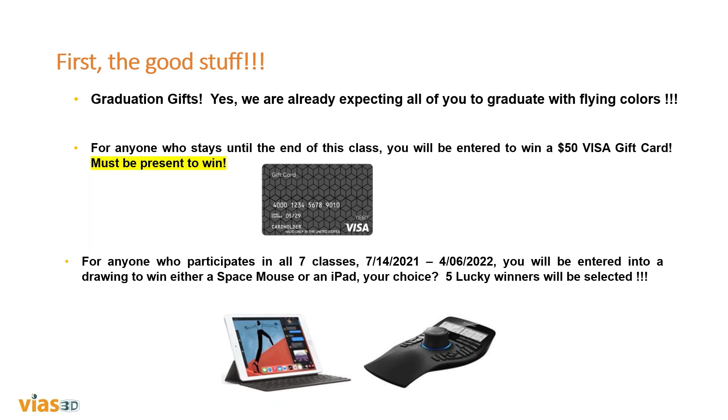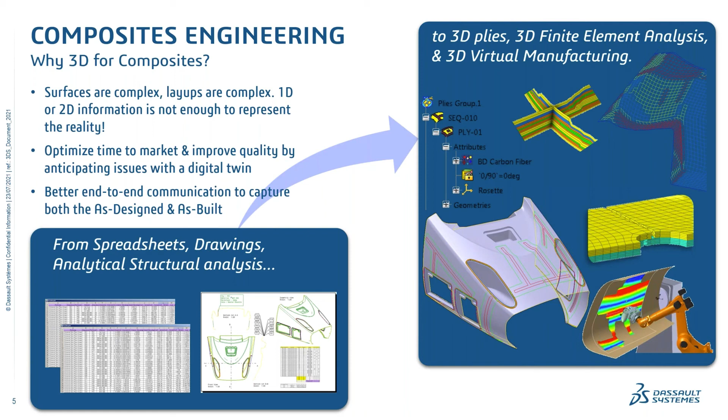So you really have this ability to capture both the as-designed and as-built by going 3D for composites. So what we propose is going beyond that 3D for composites, so the 3DEXPERIENCE platform that's going to include not just the design tool, but also all the manufacturing tools, as well as the structural analysis tools, and everything, as well as manufacturing, BOM, and everything.

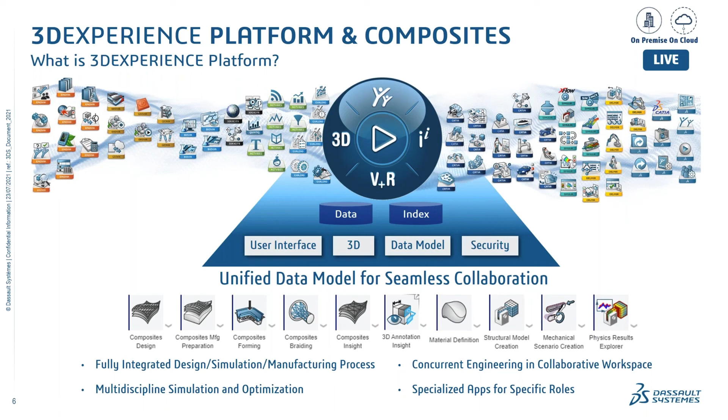So proposing the entire workflow in one platform, so you don't need to exchange data back and forth, going from your CAD tool to the FEA tool or to external software. You are able to run the entire workflow in one place without having to exchange data. You just open the data on the platform in one app or another.

And it can start at the conceptual design level, where you start to have a very raw idea of how many layers of plies you want in one area. So the laminate thickness in each area of the component you're going to work on. All that, of course, is driven by performance. So typically structural analysis performance. So stiffness, or this can be a stability requirement, or a frequency requirement, linear dynamics requirement. And of course with a weight target.

And starting from those requirements, CATIA, the software, the 3DEXPERIENCE platform, will let you iterate in order to reach the correct definition of the laminates. And then we can start to move forward, and instead of having just a view as a laminate, turn that view into plies, into conceptual plies first, and then to actual plies generated as wireframes, which you can then manipulate. You can control how the drop-offs are managed when you go from one thickness to another.

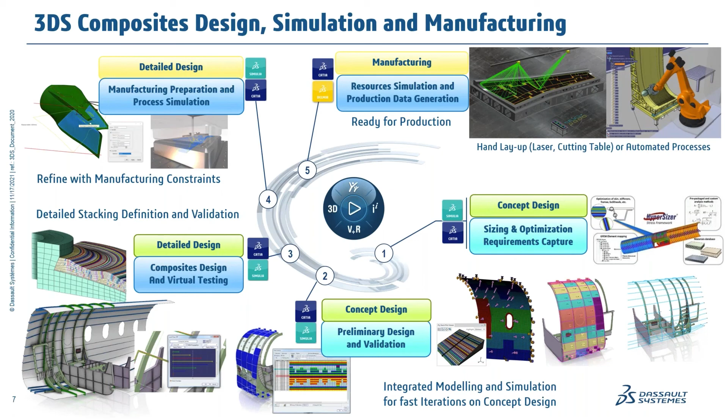And again, we do support multiple manufacturing processes. So whether we're talking about hand layup, automated fiber placement, or forming, we can do it. We can simulate the process, ensure the feasibility, and generate the necessary data in order to manufacture the part effectively in the shop floor.

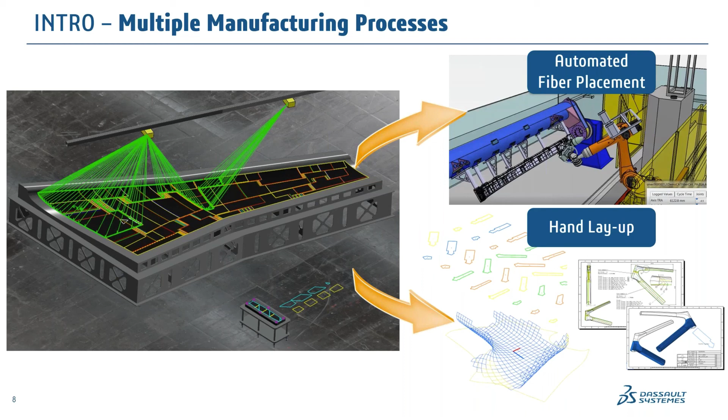So whether these are flat patterns, so the ply kit, as well as laser projection programs, we can do that. Or whether it's about simulating an automated fiber placement machine and generating the G-code, we can do that as well.

One other key is that not only do we offer a platform to have an explicit 3D design of plies, but also once you get those plies designed in 3D on the geometry with many complex refinements, as you will see deeper, we can also automatically have a structural analysis model generated and associative to that 3D model.

So it's really changing the game in that mindset: you have one master model, this digital twin, truly driving the design stages, going through the design stages as a master model, but you have many different connected models, such as, for example, a structural analysis, which can be connected to this master model and gets updated as the design model is changing.

So it's really a new approach, because if you have a surface change, this would be reflected automatically in your CAE model. And same thing, instead of having the CAE model where you refine the ply definition, the laminate definition, here you start right from scratch in the same CAD design tool. You have already your laminate definition and all the thickness requirements. It's all there. So you do not need to do back and forth exchange between structural analyst and design engineer, because everything is at the same place.

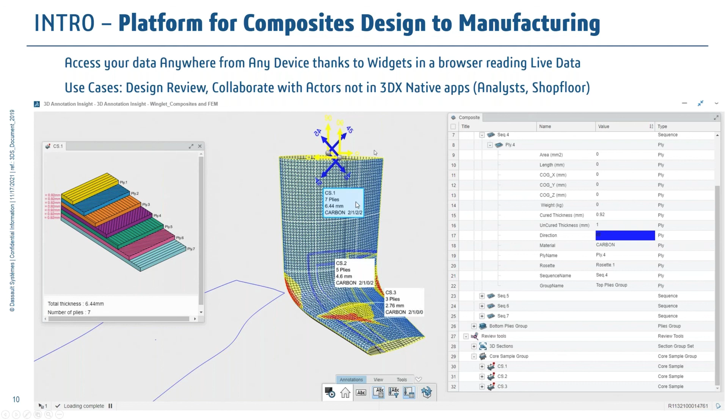In the shop floor, typically you may have just an iPad or a screen, but you may not have a computer, at least not when you are manufacturing the part. You probably don't want a computer for designing, for authoring the part. So having such a tool will allow people to check the information, to check the data as they were intended to be manufactured. This can also be used not just during manufacturing, but after manufacturing for maintenance and repair operations.

So any questions so far?

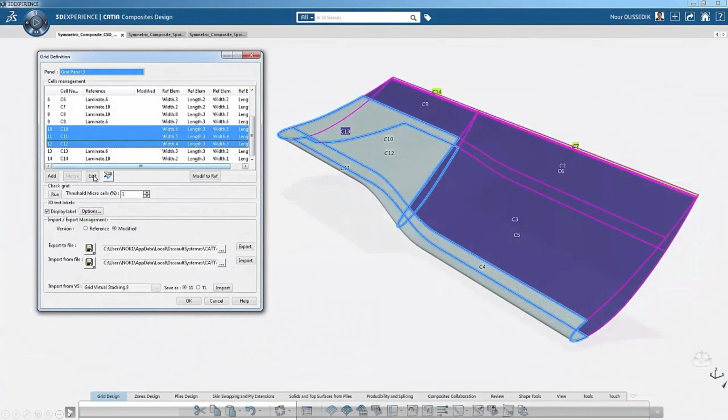Let's have a quick look at an example part where we're going to go through the entire process, and then I will do a deeper dive on each of those steps. This example really starts from scratch, where you create a geometry from some NACA curve. Then we have the geometry. We're going to define some reference elements. And in CATIA we do what we call a grid. The grid is defining regions: we use geometry lines to split the full surface into sub-regions, into cells. And each of those cells will then be associated with a thickness.

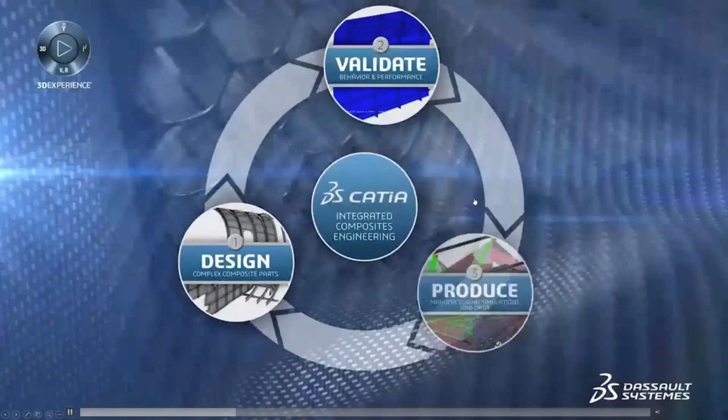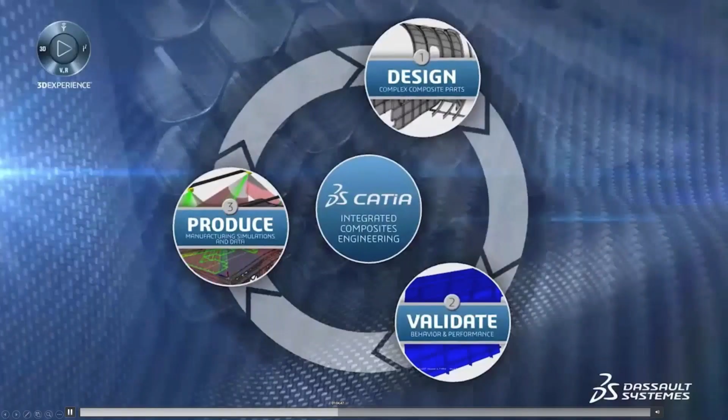Once we have each of those thicknesses associated, we can generate plies. Why? Because we have some drop-off areas. When we go from one thickness to another, we do it gradually with a ramp. The nice thing is this 3D object in the platform can be used for any kind of simulation. Here, for example, you see a CFD simulation, but obviously we would also want to use those structural properties for a structural analysis.

So supported processes: it's not just hand layup, it's also liquid molding and automated placement. And here, that's what we're gonna do. We're gonna simulate the fiber. We're gonna do some fiber simulation on each of the plies, and we're gonna generate all the flat patterns. From then we can generate plybook drawings basically, and we can also generate a laser program or even simulate a

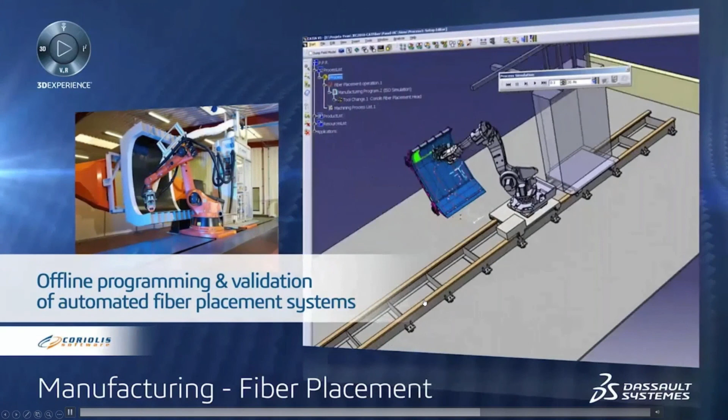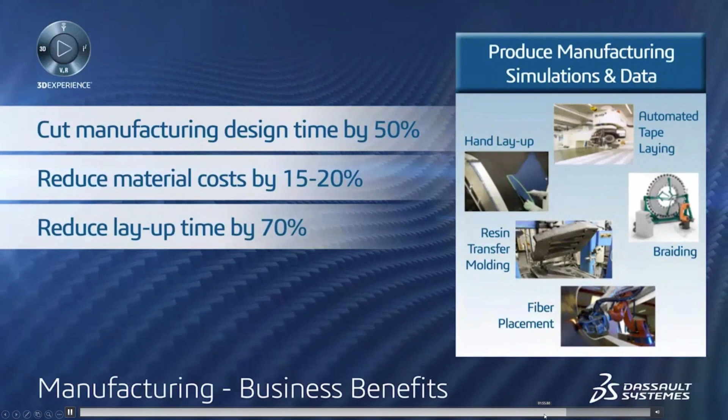robotic fiber placement tool. So we support also some dedicated processes such as, so this is pull braiding. We also have an app for the forming process simulation. So we did quite some extensive work on those two processes, which have the potential for high volume production as

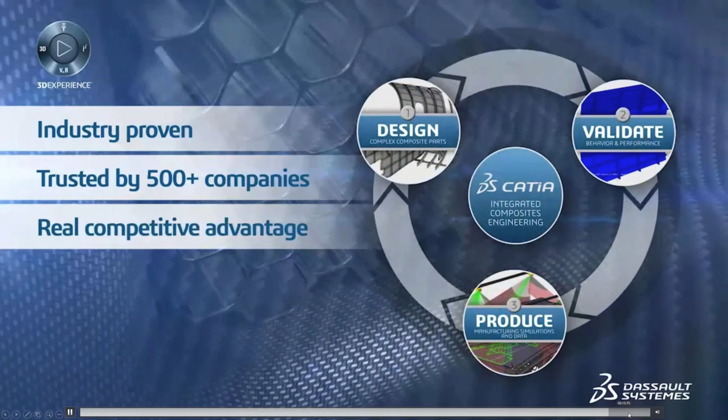well. And so this software has been in use successfully at Boeing, Airbus for quite a number of years, since the programs I was mentioning before, 15 years ago. And we continue to improve and to gain new markets and try to follow the trend. So you will see this is a very comprehensive suite of tools.

So how does it start? This is the beginning. First, you need to have a material created in your database. I'm assuming most of you are familiar with the 3D Experience platform. But if not, the first step when you are in CATIA for structural analysis, for Simulia, or even if you want to do a weight analysis, you need to have a material defined. You need to have this material object created in the 3D Experience platform.

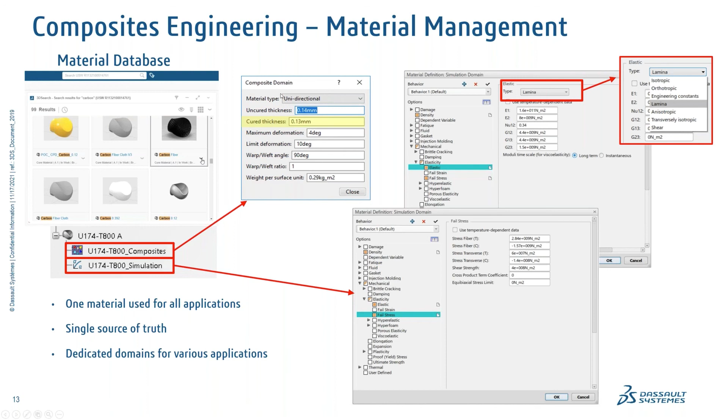And this material object has properties like density, but then has some specific attributes gathered into domains. So there's the domain dedicated for composites. If you go with the composites domain, you're going to be able to assign those attributes that are going to be used by the composites application. Same thing, you will want to have not only the manufacturing and design view of those composite materials, but also maybe their structural properties.

So you define all the elastic properties in two directions, the E1 and E2 that you can see here, defined in this material card. It's basically an Abaqus card. The nice thing is you define everything in one place. It's one single source of truth.

And then we're going to use this material assigned to the geometry through what we call a ply. You can create a ply manually simply by selecting a surface, selecting an axis system that's going to indicate what is 0, what is 45, 90, and so on. And then select a wireframe on that surface. And that's it, you have a ply. You just need to assign it a material and a direction. And directions are specified based on that axis system.

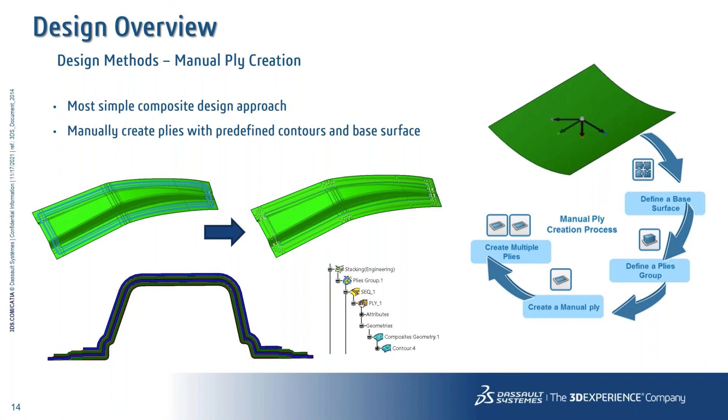So you need to have a material first, and then it's very fast to create a manual ply, simply by selecting a geometry, a wireframe on the surface. And we can copy paste plies to generate as many as we want.

Another smarter method is when you have a fairly complex design, typically a grid design. It's especially when you have a skin panel that's constrained by some reference stiffening elements. Example of the wing skin panel, where we have ribs and spars running underneath the skin panel. So we have this skeleton with all the reference elements. This is what we're gonna call the grid or the grid panel.

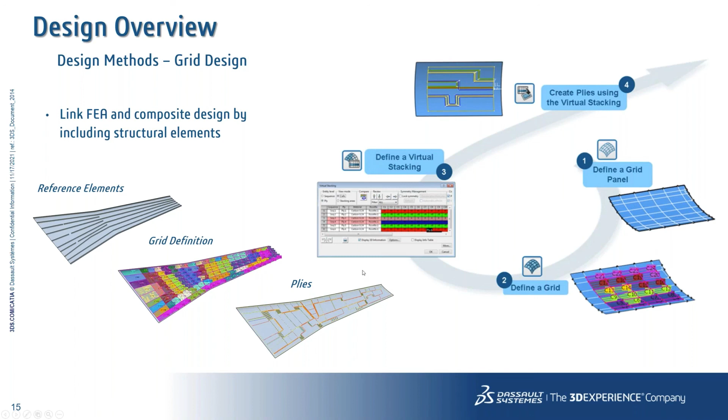And then we're gonna address this grid with all the laminates, and that gets us the full grid definition, when we have not only a skeleton, but also the laminate definition, the requirement in terms of thickness. From then, we can take this grid and ask the software to help us generate plies. And plies, this is what I was referring to: basically a complete wireframe that's defining a region and that's associated with a material and an orientation.

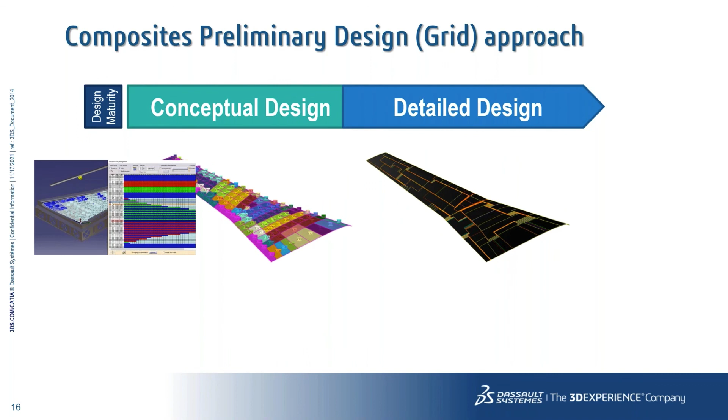So this is how it works, basically. You have the conceptual design. And in the conceptual design, you don't know how the plies are gonna be arranged. You just know how many layers you want in an area.

And now you move into detailed design, which is basically you say, okay, not only I know I want 4 layers here, but I know I need to start with some 0 carbon and then put my Kevlar in between and then wrap this up with the 0 of carbon. And then in this other area where I just want 2 0 carbon, then I want to ensure the continuity of my plies going from one area to another.

So you see, the difference is basically having a very conceptual view just from a structural performance mindset into something where you really have your true digital twin of your composites model as it's going to be made in the shop floor. And really not only how it's been made in the shop floor, but how it's going to behave later on through the whole life cycle of the part. So this is what I mean by digital twin, is the actual ply representation.

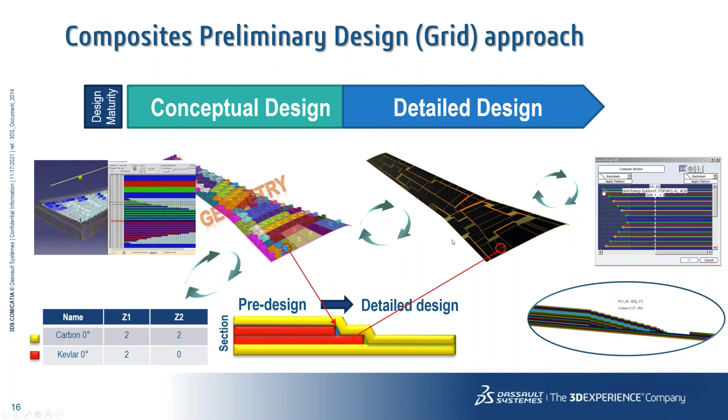So CATIA Composites Grid Design is gonna help you to cover this transition from conceptual to detail. And of course, throughout this transition, there may be some changes that you will be making, and you will be potentially managing the drop-off, maybe changing your mind here, how many layers you want in this area, and then you have to update the detail model. So all of that is possible to manage with CATIA Composites.

So once you have your full ply digital twin model, there are many things you can do with it. So you can, of course, prepare for manufacturing, and we'll talk on that. But you can also manage, if you have also done the structural analysis in real time, but you can also just review those models for design and approval review meetings, for sharing with other people who are gonna be involved in the project.

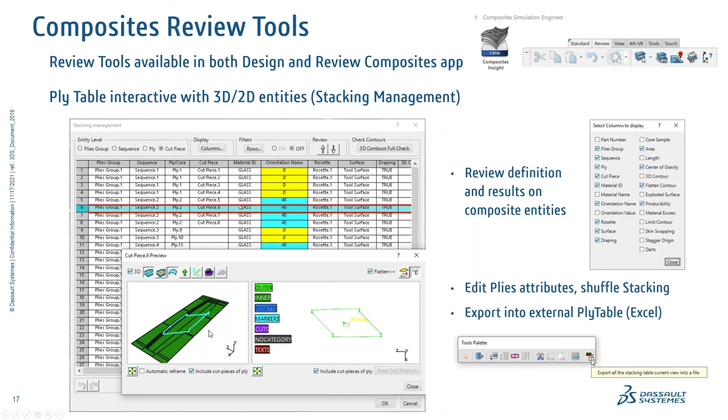So you can just simply click on the 3D plies and you will have this view as a material ply table. So the nice thing, it's not just an Excel spreadsheet, because if you click on one line, it's gonna highlight in 3D the location of the ply. You can also generate cross-section out of the surface. You can also generate core sample like I was talking about earlier. You can check the weight. So we have some very accurate tools that's going to give you the weight and balance information for a given part.

So as I say, the plies are defined by wireframes on the surface. You can generate solid, or you can also generate one surface for each ply. Not recommended, because if you have 500 plies in one part, it's gonna be a lot of surfaces to handle. It's gonna be very cumbersome. So this is why it's a much better and much more efficient approach to have just wireframe on the surface and generate the cross section when you need to view what's happening.

Any questions so far? All right. So I will take the questions at the end. There are some questions, but let's take them at the end. Okay. All right.

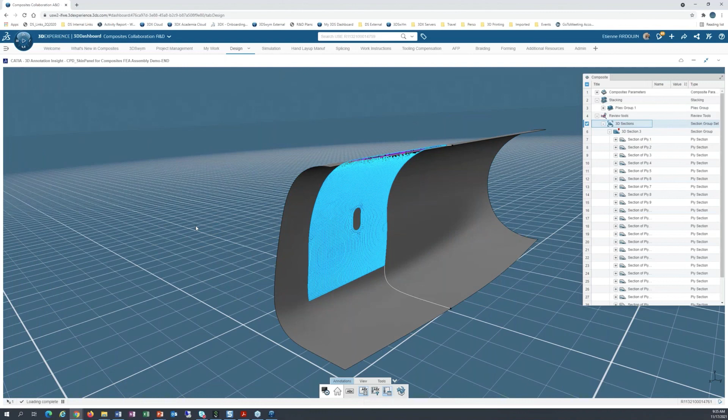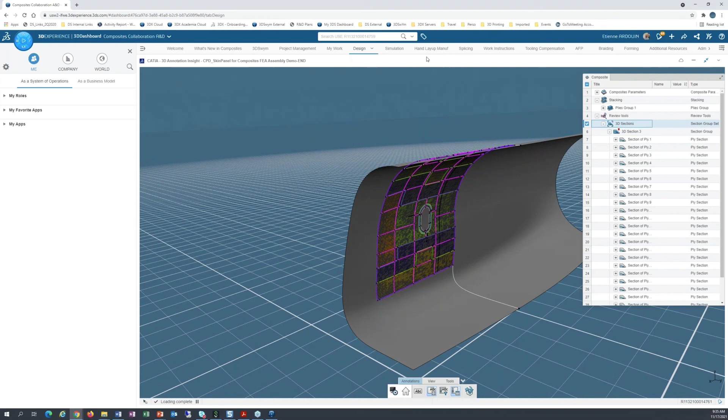Sounds good to me. So what I meant basically, here I'm from the web, you know, so this is Google Chrome. I'm connected to my platform, and I have here this dashboard that I created. And on this dashboard, I can simply just call for a couple of applications, like 3D Annotation Insight is one of them. And let's do that. So let's say that I'm gonna create up. I'm gonna decrease that.

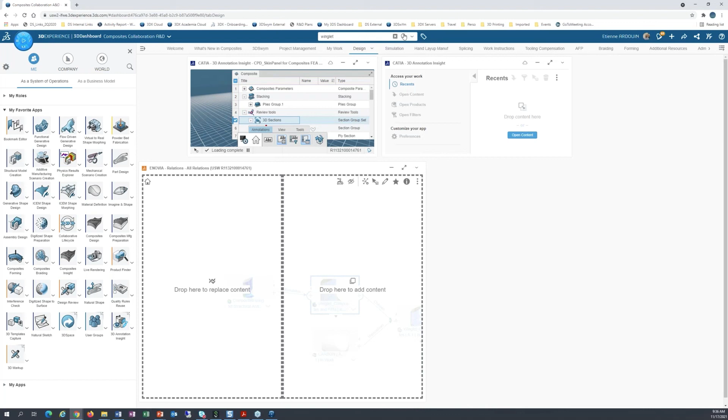So I'm gonna decide the platform I'm gonna search my data on. And for example, I've been notified that I need to work on a specific model. So I can simply go ahead and search for that data called, let's say, winglet. I search for that. So I'm searching in my database, that's the platform that's internal to my company. And let's say that I have this one.

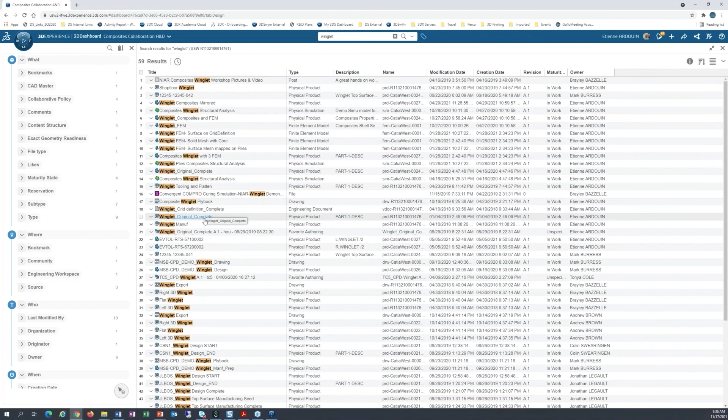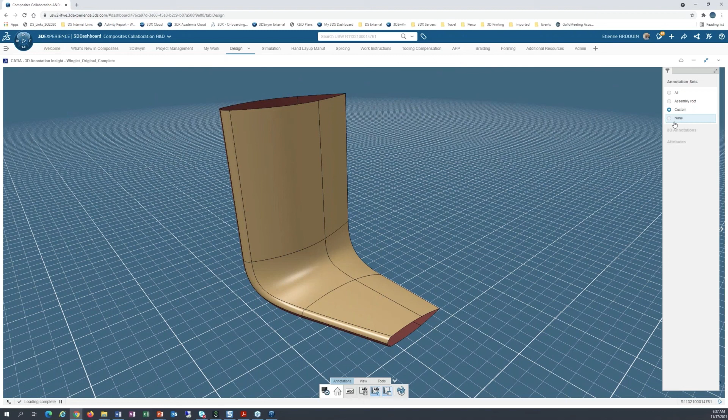And I'm gonna just simply drag it and put it directly from my web browser. So I can do that from my computer, but obviously I could do that from an iPad or any kind of device that's supporting a web browser. So the nice thing is, I'm supposed to have, oh, okay. So let's take this one I have already opened. Because this model has the plies created, the one I just opened didn't have the plies.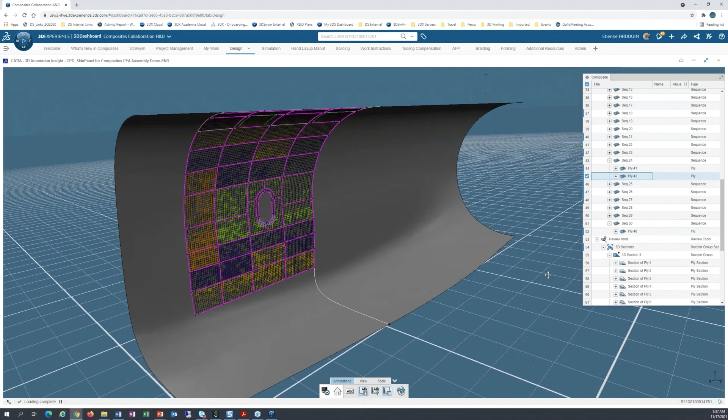So if I have the plies created, then you would be able to review all those entities directly from a web browser. So for example, you can review all my plies 2, 3, 4, 5, all the way up until 48. You can review each of them directly from a web browser, and that really makes a significant difference. So let's say that you need to give your approval on those sort of design, then you can basically do a virtual review on that at this moment.

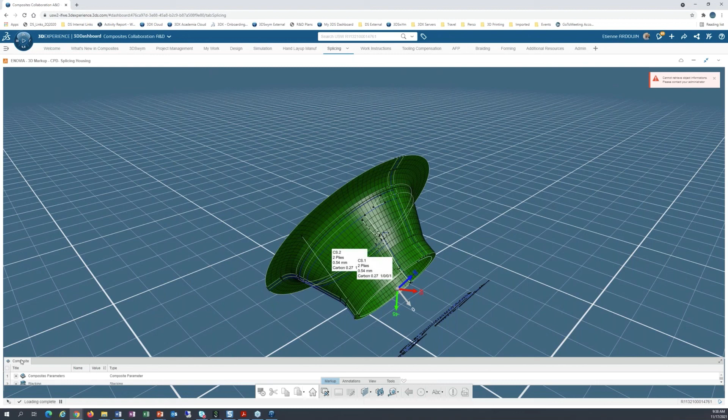One other example would be on here. So on this one, you are able to do some annotation as well, some markup. So you can specify if there are some areas that need to be changed, that need to be reviewed. You would be able to specify that in a 3D window.

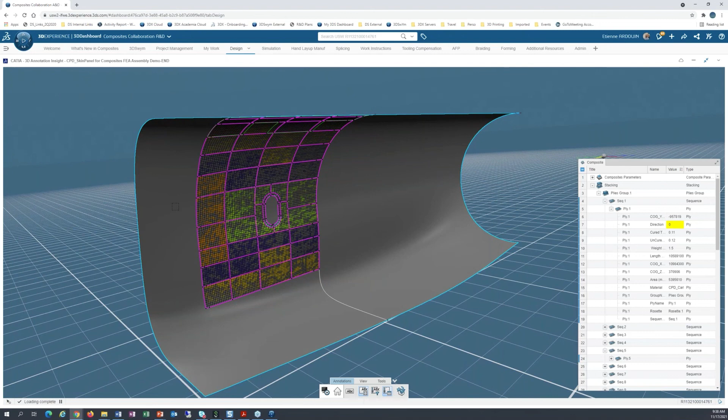And so the nice thing is once this is created, once this is reviewed from the web like that, then you can simply just drag and drop this object into the actual CATIA client, which is the software that's a little bit more heavy than just a web browser. The software where you can create your geometry, and here in that case, assign your laminate definition.

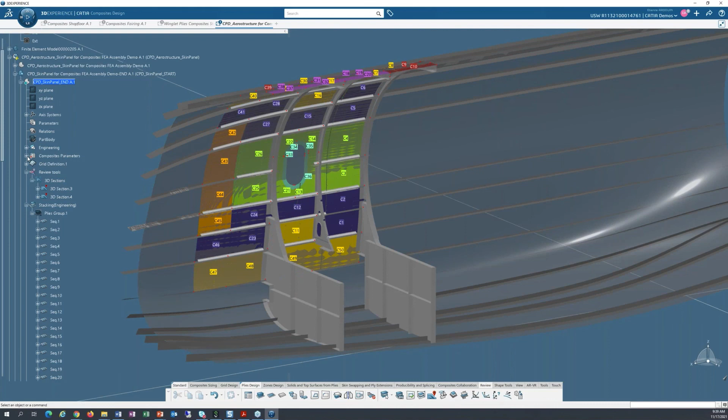And so we have two choices. So we could say, okay, I want to simply create plies, and I'm just going to use this grid panel definition. So that would be possible.

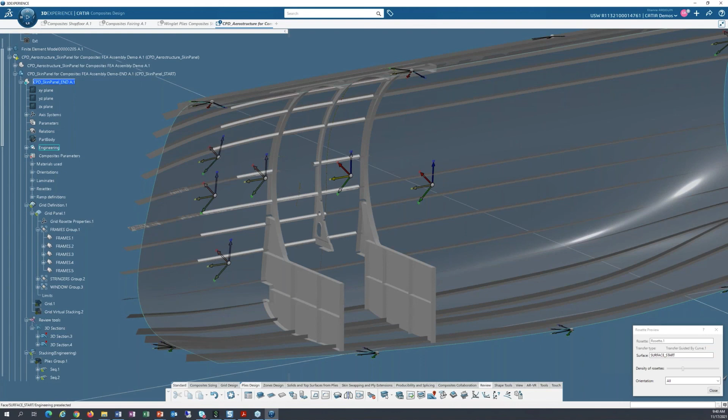How to start your composite design? So you have your composites parameters first, where you have the list of materials, so you can add other materials from your database, the list of directions, the rosette that can be specified, guided by a curve, or that can be specified just simply by picking an axis system. So as you can see, you can have a clear view of how the orientation will be mapped in each location of the surface.

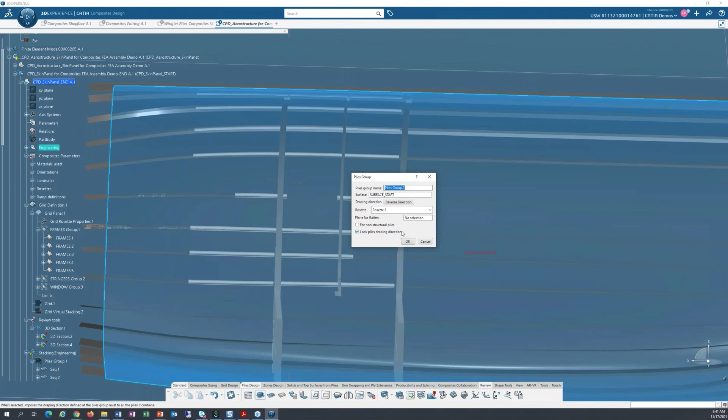And once you have all those main parameters, which are going to be used for the entire part, then you can go further and define simply a ply. So to define a ply, you can simply just create a ply manually. Oops. You can create a ply manually, first by defining a new ply group, and then creating your ply.

I have some updates going on the other 3D section.

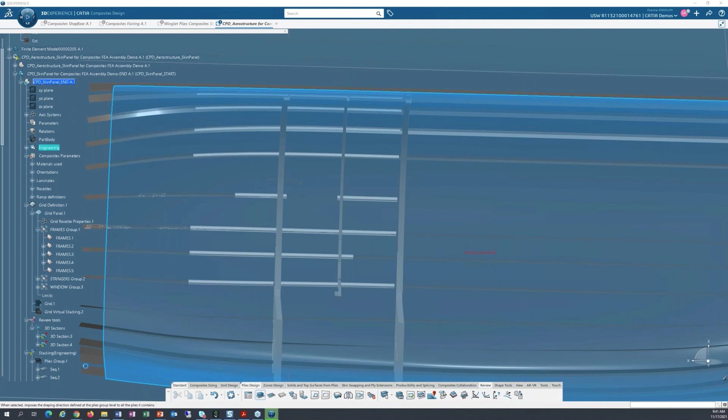Okay, and then going ahead and creating a ply. So the ply definition, like I said, basically you just need to specify the contour that you want. So this can be as simple as picking some wireframe. So I'm gonna just pick a couple of wireframes like that. Yeah, maybe not this guy. I'm gonna pick a bigger one.

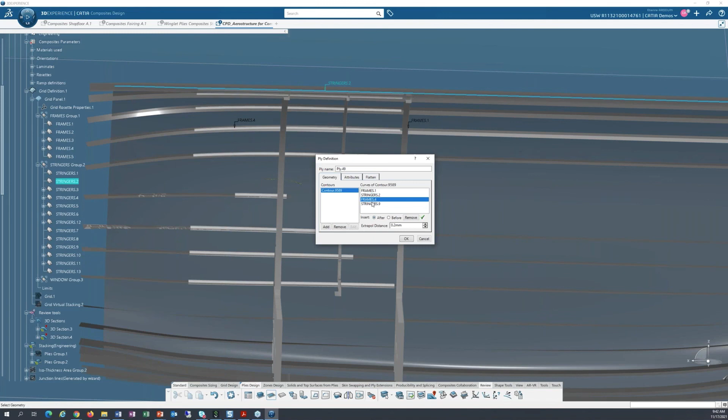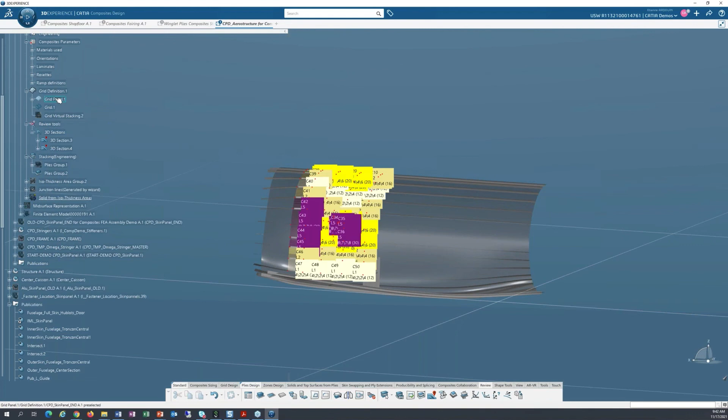And as soon as you are closed, so now we have all those 4 wireframes that are defining a closed area, then you can just specify the material you want, the direction you want, and that's it. You created a new ply. So it can be as simple as that to create plies, or you can do a little bit more refined approach where you would have the grid definition.

And the grid definition basically consists in defining the areas, and each area will have a certain laminate. And those laminates, you don't specify the order of the layers. You just say how many layers you want in a specific area and how many layers of each direction of each material you want in a specific area. And that's what is defined at the level of the grid.

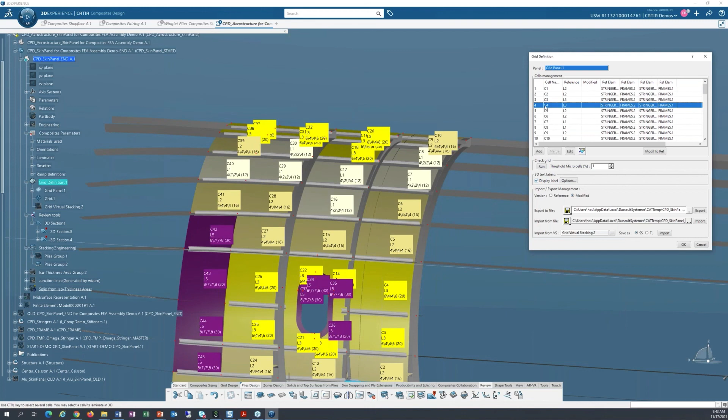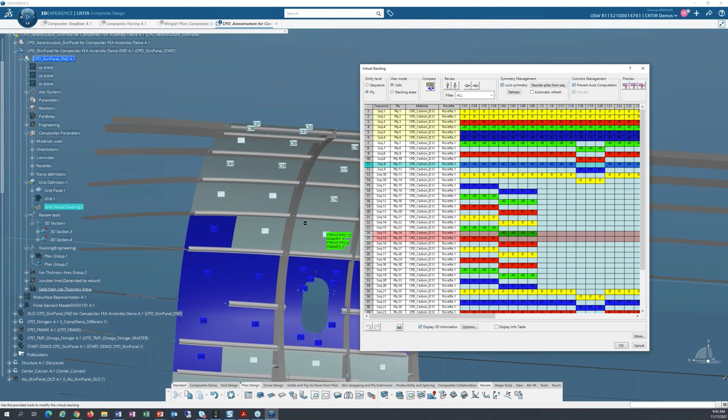So once you have this conceptual view, then you can turn this conceptual view into something that's going to be a first step into the plies definition. This is what we call the virtual stacking. And this virtual stacking basically is going to give you a better view on the ply map as it's going to be created.

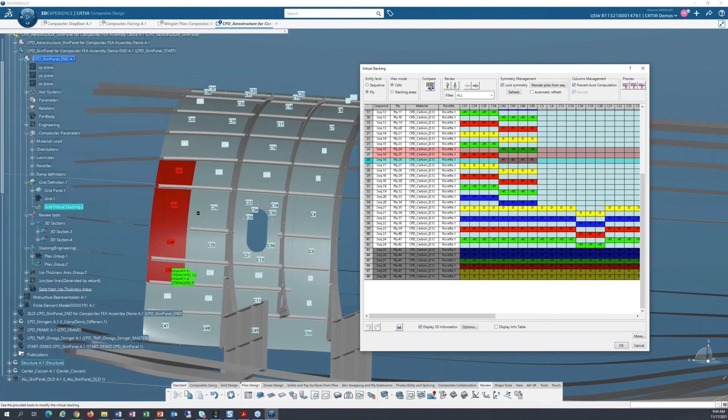This is where the software is extremely helpful, because the software will propose you some design based on the laminate requirement. It's going to propose you groups of plies. So the software will propose how to assemble together regions in order to form plies. And that really is extremely powerful to turn a conceptual view, a finite element analysis model view, into something that's going to be manufacturable. This is really extremely important.

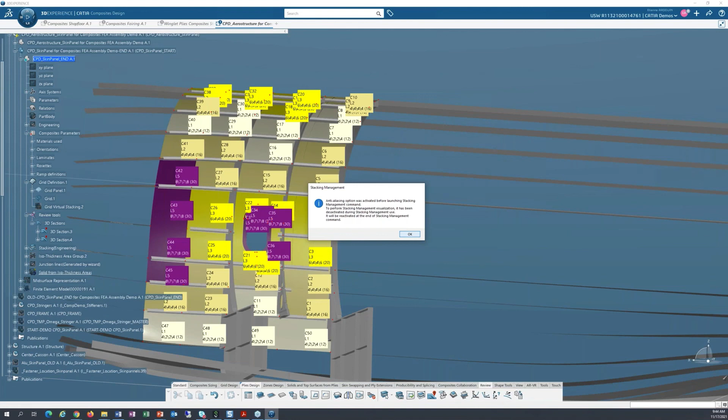So an important point also, with composites you have all the ability with the review tool to perform numerical analysis. If you just simply double click on the stacking, you would be able to review all those plies. And they are highlighted in the 3D, and they can even be shown in a separate window like that here. If there's a flat pattern computed, that would show up as well. So you have this stacking table that really helps a lot to control the digital twin.

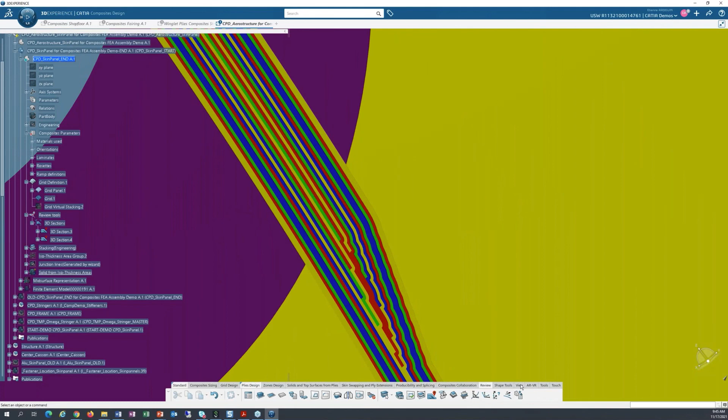We are also, of course, able to create cross-sections, like I was showing earlier, so that can be extremely helpful in order to review better what's happening, to understand better the design of your part. So you can perform cross-sections, and obviously as well core sampling, which consists in providing you a view in one area.

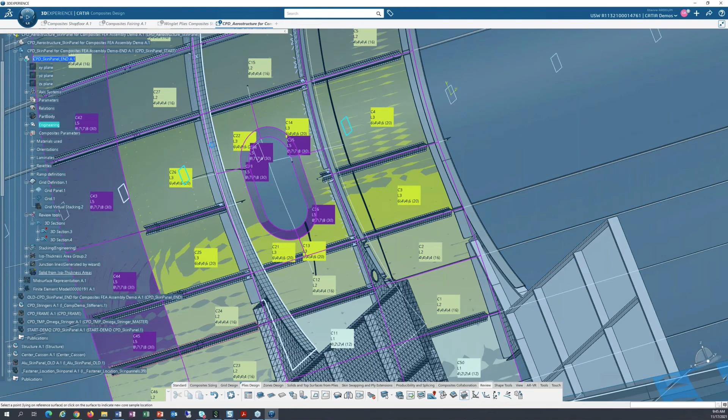You have the clear view of all the plies that are located at this area. So it's extremely helpful for maintenance and repair, but also for quality assurance. And it's very important also to use through the design concept, through the design stage.

So let's come back for a minute. I realize time is flying. I just have 15 minutes left.

So if we come back now on the deck of slides, let's have a quick overview of composites manufacturing. So what do we do in CATIA for composites manufacturing? Well, first we take those plies, which is the first level of refinement from conceptual to something that actually exists. And then we're gonna prepare those plies to make them manufacturable.

So typically there are several considerations in composites. First, we always trim the plies after they are cured. So what you want is to have on the shop floor on your tooling a little bit more material than what you will have in the end after the edge trimming. So you're gonna do what we call material excess. So that's why we have an engineering edge of part and a manufacturing edge of part, and we provide tools for that, for extending those limits.

Also, another thing is that during the curing and actually after the curing, when the parts get demolded, we find out that the part is shrinking and warping a little bit compared to the tooling. This is due to various phenomena like the difference of CTE between the materials. An unbalanced laminate also can cause some effects, or any kind of cause that would lead to some imbalance in terms of stresses inside the part is going to generate those warping and shrinking phenomena that you see on the composite part.

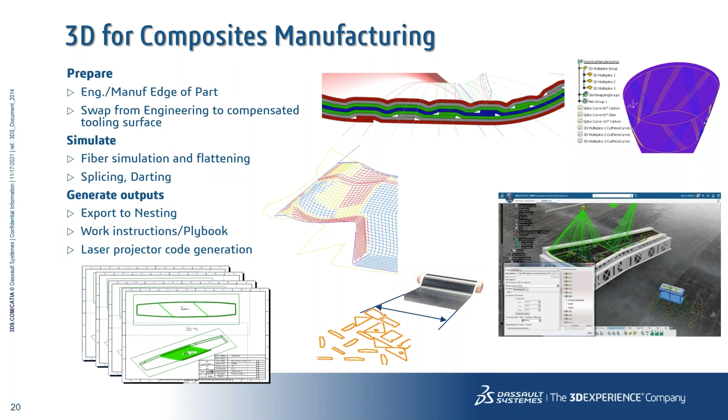So a key aspect of the software is really the capability to do fiber simulation. In fiber simulation, you pick a point that's going to be the first point of contact between your ply, your piece of cloth, and the tooling. The first point, the application point, if you change its location, as you can see, is going to change dramatically whether you can make the part or not, and also, of course, the shape of the flat pattern that's necessary in order to drape this part.

So what we offer in the software is a dynamic draping capability that's pretty unique, that's gonna let you navigate through and try different areas for this first point of application, in order to find what is best to make it work on the shop floor.

Once we identify what's best, we can review it with the shop floor operator by replaying the simulation. An example is this C-channel, where we're gonna start first to drape the web and then drape all the flanges. It's always very helpful to review this kind of simulation with the shop floor to ensure that everyone is in agreement and that it's feasible.

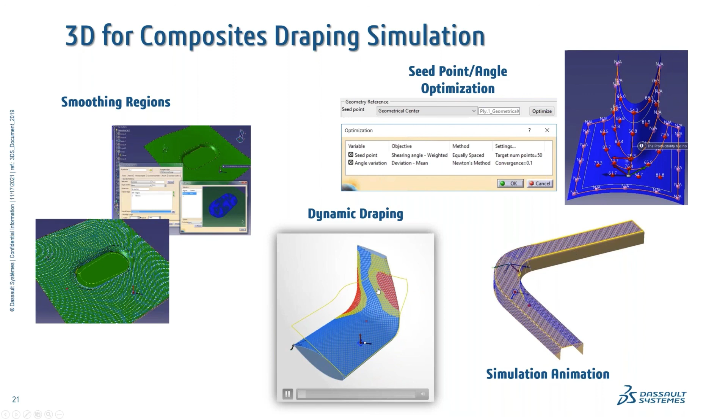And for the seed point location, how to find it: you can look around on the surface to try to find the best location, the best position. Or you can also use our algorithms that are going to propose an optimized solution. So seed point and angle optimization based on minimum shearing. The software will try to minimize the shearing. Those red areas will be minimized, and it will find for you the best location of the seed point.

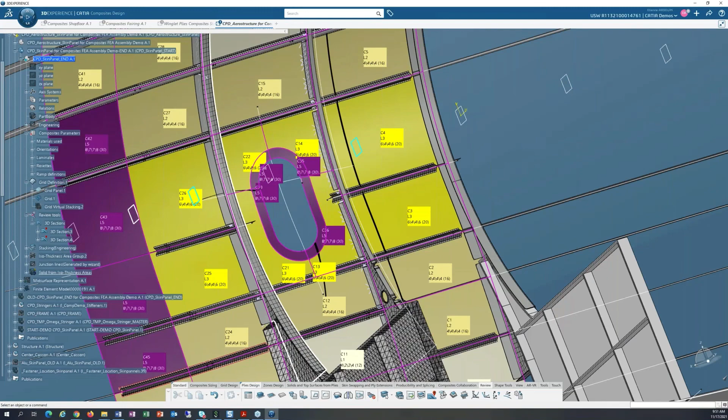Okay, so maybe I will show... I will come back on the software. All right, as time is flying and I want to make sure that we have time for everything, I will go fairly fast. I won't have the time to demonstrate everything.

So I have here this full ply. And as you see, this full ply would be too complicated to make. How do I know that? I'm going to go from my CATIA Composites Design app, move over into the Composites Manufacturing Preparation app, and do producibility for hand layup. So I'm going to check: is this producible? Is this manufacturable?

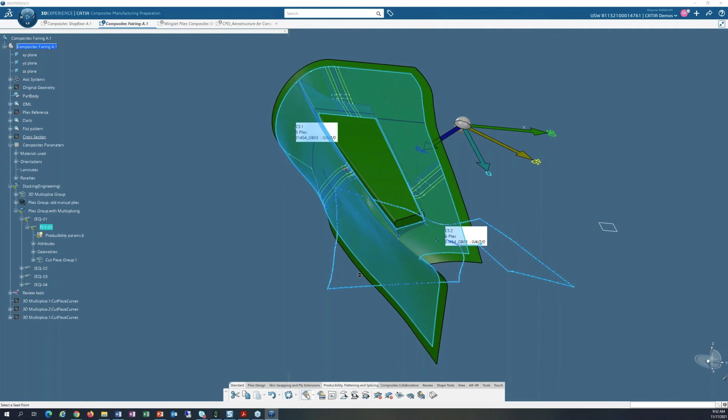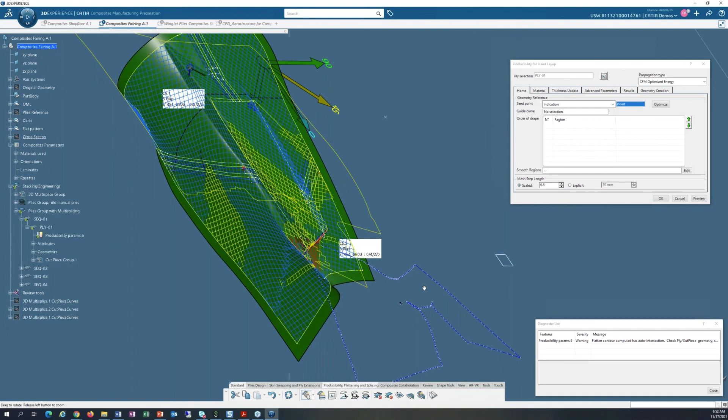And I have this panel here, producibility for hand layup. I'm going to click on indication and try this. So what you're going to see here is fiber simulation. And as you can see, this is quite a problem here. It appears pretty obvious that it's going to be very difficult for me to make this part.

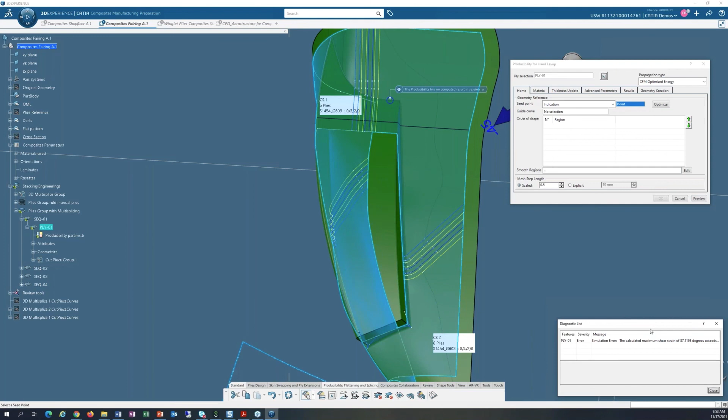If I want to make it in one piece, it's going to be very difficult due to the complexity of the geometry, you see? If I locate my seed point over there, I can't even run the fiber simulation. And even if I locate it, the maximum shear strain is too high. So what that tells me is that I won't be able to make this ply in one.

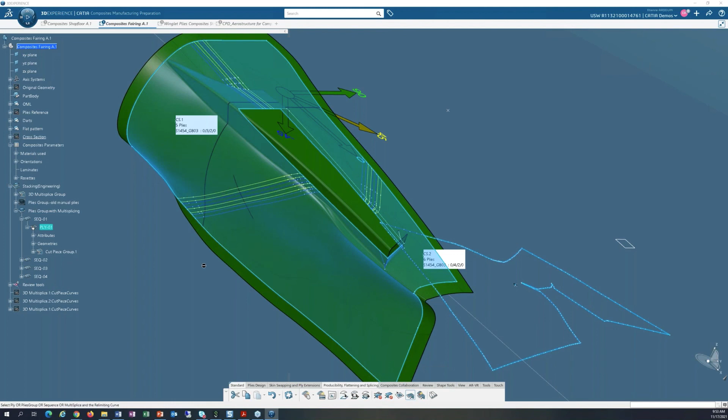So in that case, what I did was the splicing. Splicing is about taking a full ply, defining the curves that are going to be used for the splicing, and defining how much overlap you want in each area. And instead of picking just one ply, you're going to pick several of them.

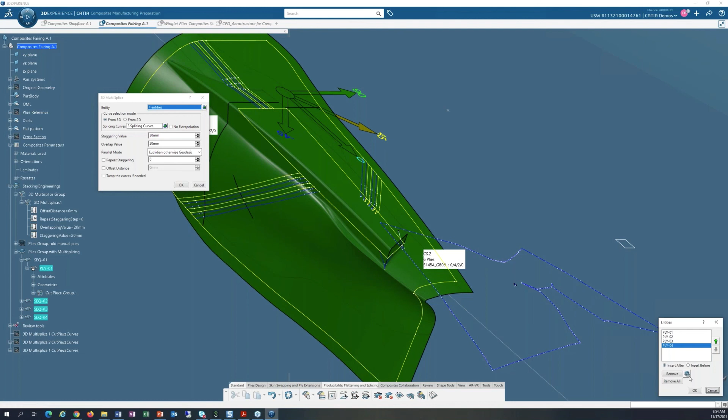For example, here I have 4 plies that have been selected, and 3 splicing curves that are here, here, and there. And this tool generated all those sub-plies. So from my conceptual ply, I now have sub-plies that are possible to make based on the size of the roll and based on the manufacturability.

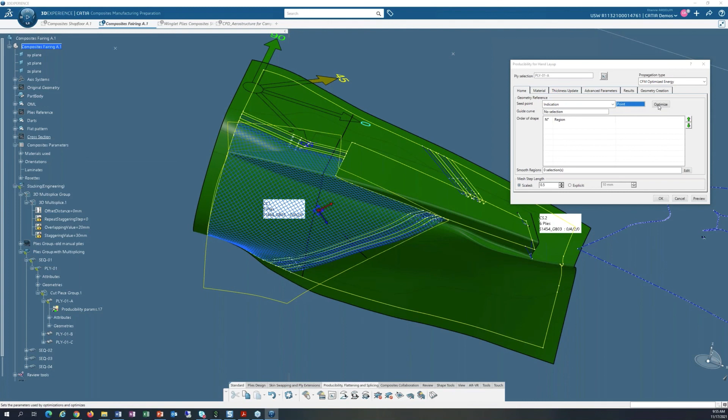And if we want to take a look at this one, for example, we can just run the fiber simulation. I'm going to move around the location of this seed point, and as you can see, live, my flat pattern gets updated. Extremely powerful capability. And of course, I could simply use optimize to have optimization techniques available to minimize the shearing. So this is minimizing how much red area I have.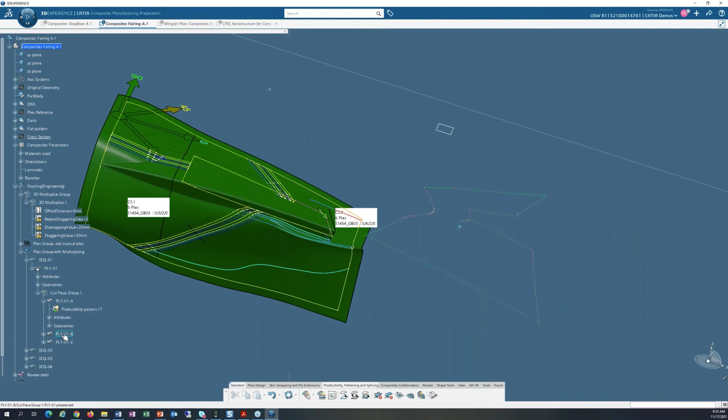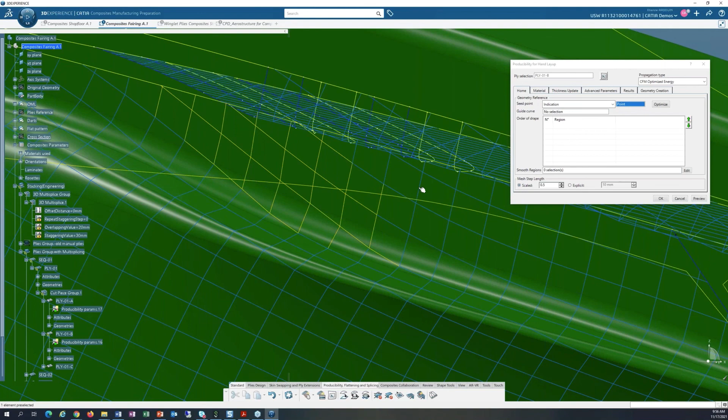This example is not appropriate as it works pretty well. So let's have a look at this one, which is a little bit more tricky to manufacture. So minimizing those areas where it diverges too much from the ideal rectangle, and you start to have angles that do too much shearing. Too much shearing is what is measured as a critical condition for the fabric to be able to drape onto the surface.

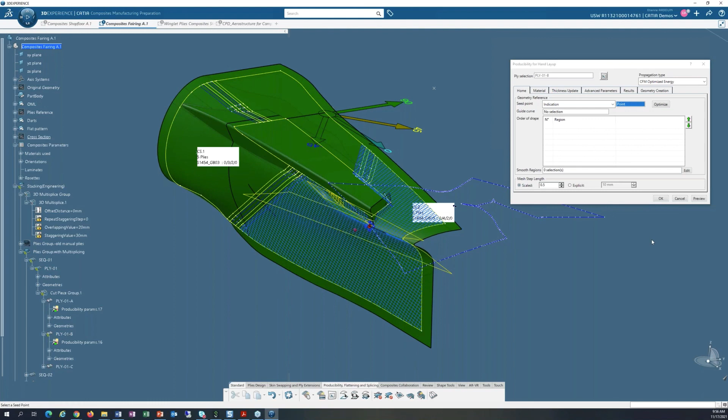Once you have this fiber simulation, you have a discretization in 3D of the part of the cloth, and we can transform it into an ideal view, turning all those sheared angles back into square angles, and we get the flat pattern generation. This can be done for one ply or a bunch of them. Then the next step is to export that. For example, on this little rib, we can simply export all those plies for nesting and cutting into the ply kit.

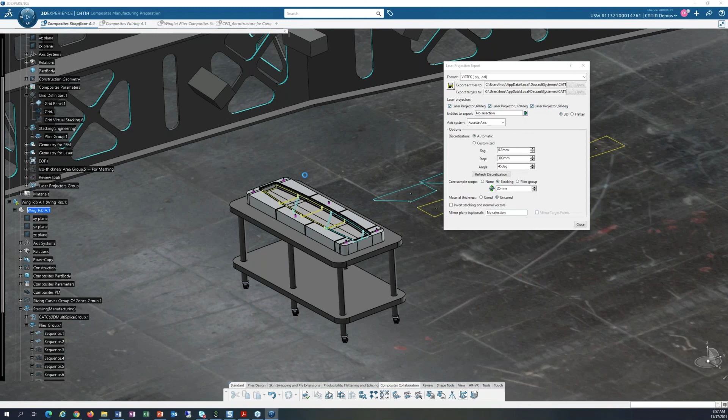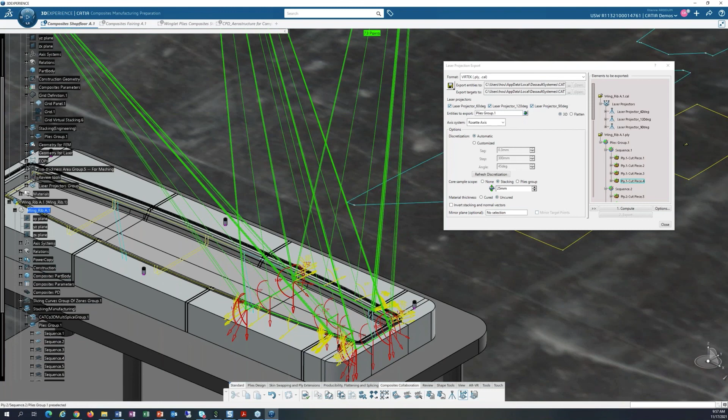What we can do also, I will come to that in just 1 minute, is take one ply, for example, here, and have the software generate the laser projection code used for the laser projector to display not just the ply contour, but also any annotations associated with those plies.

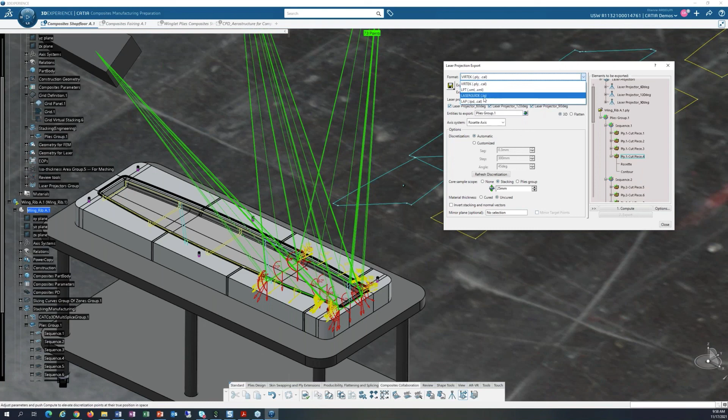And you can export that into various laser projector formats from Virtek, Faro, LPT, Aligned Vision, LAP. So we support a variety. And this ply kit can be exported into the DXF format. We support also IGES 2D, but typically all the cutting systems read DXF files. And so this is what we do.

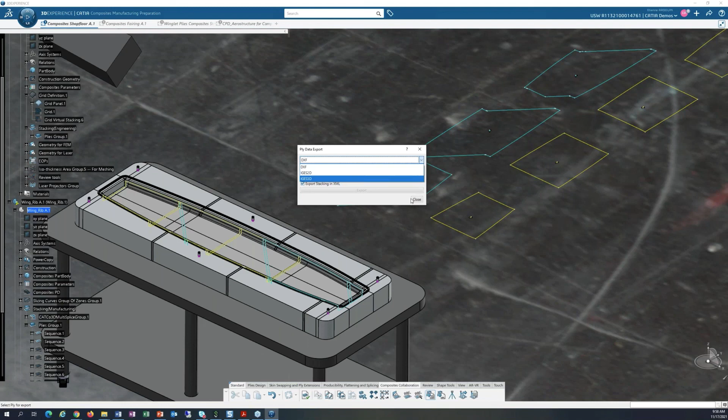So I know it's kind of a lot to absorb in just a small amount of time, but maybe it's time at the moment to take some questions. What do we think, Suzanne, Glenn? Yes, let's take the questions. We'll leave you on because you might have to show some things.

So here's the first question. You mentioned digital twin and platform often in your presentation. Can you explain those two topics in a little more detail? Oh, yeah, sure. So the platform, this is the actual software that we are using. The platform is basically the collection of all those applications. It's like an operating system, but for engineering software, if you want. And so I'm gonna try, yeah.

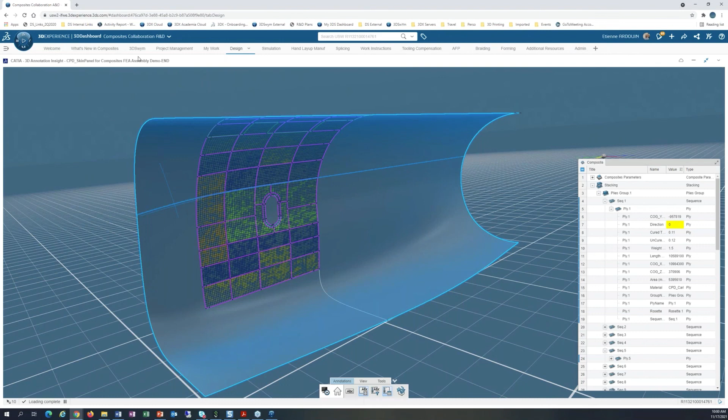All right. So basically this is this unified infrastructure that connects all the apps developed by CATIA and now SolidWorks, as well as Simulia, which includes all the Abaqus team, or Delmia. So all our software involved in design, simulation, manufacturing, or any other discipline or supply chain, and of course PLM. So at the foundation of the platform is a strong PLM foundation. Being able to trace your data is key.

Up, there we go. Oh, I wanted to show that.

And so this is the platform. The platform is this infrastructure that's gonna let you connect all the apps from various disciplines. And this is also what enables the digital twin, because basically it's like a virtual universe. I know the term metaverse nowadays is becoming more and more interesting, but we do metaverse for engineering and manufacturing, somehow.

And this is what a digital twin is. Basically, you have a full description of your part, how it's designed in 3D, how it should perform, so that's the virtual testing, and how it's gonna be manufactured. All that happens virtually before the physical world. And this is what we mean by digital twin.

Then there's also the concept of digital thread, where you have all the apps that can coexist together, where you have all actors acting concurrently on live data, and this is a digital thread. So all of that is enabled by the 3DEXPERIENCE platform, because it's one unified infrastructure for all apps. I hope I'm not too conceptual on that, but there are tons of examples to illustrate.

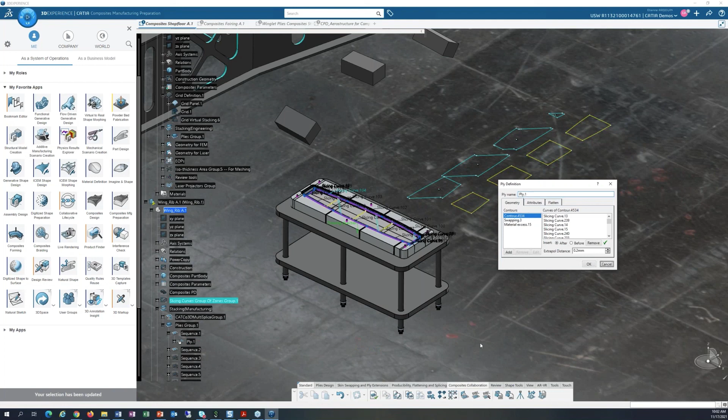Okay, here's the next question. How do you define a hybrid braided fabric, such as triaxial and biaxial fabric regions on the same ply layer? So the ply can only be either biaxial or triaxial. Otherwise you have two plies. But we have some latitude in the fiber simulation software to specify some material models. So I'm sure that depending on what you want, we would be able to do what you are looking for.

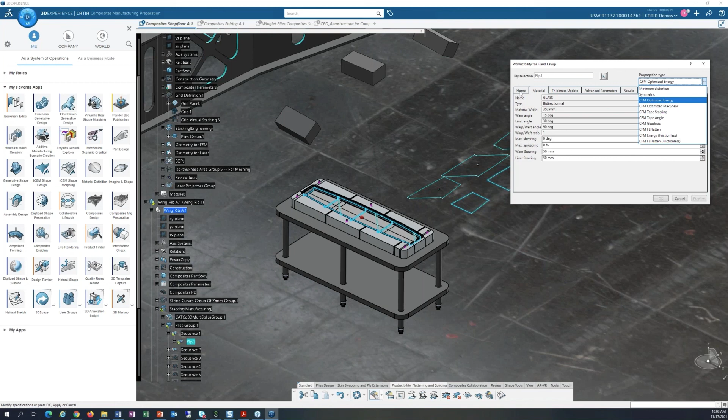I think this question would have to be dug into further. Yeah, so those are the algorithms that can be used, and you have some material models also. You can go from bidirectional to more one-directional. And for triaxial, we have some other algorithms that may be interesting. But one thing I want to say is that it's really intended for biax and UD. So we don't have a triax-specific material model.

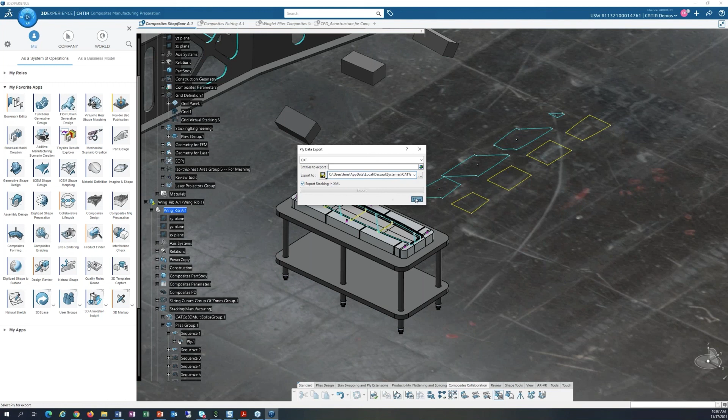If you go to Composites Collaboration, you can actually go ahead and export the data as XML. And this XML file would be read in JetCam, so you can retrieve all your plies and their attributes, as well as, of course, all their geometry for nesting. But that's not done in CATIA. It's inside JetCam. Okay. So, Glenn, can you take back over the screen? That's all the questions that we had.

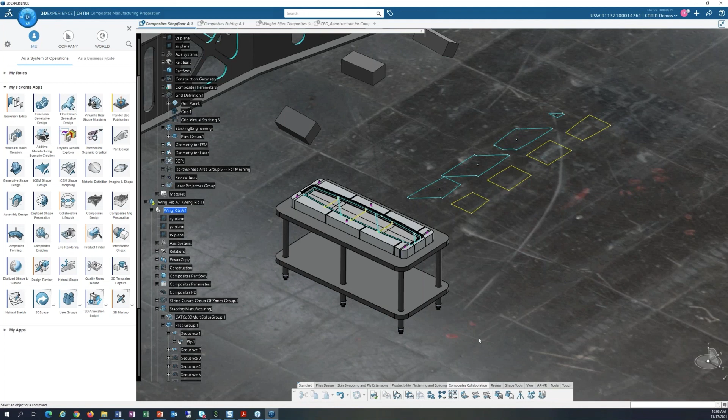Absolutely. And I'd like to make a comment. I mean, what a good presentation. I got so much good information out of it. I loved some of the automation on the nesting and the meshing and the material. It's just great stuff. Thank you. Thank you, Glenn. Okay. Yes, thanks, Etienne. It was awesome.